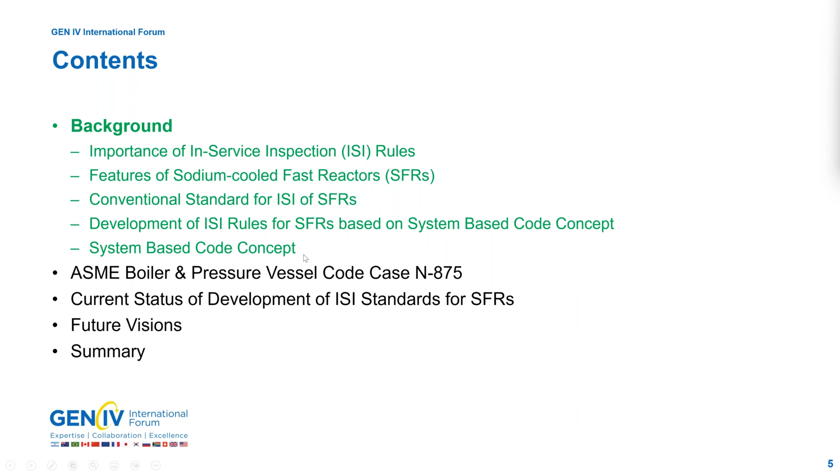In-service inspection rules provide requirements for periodic inspections of passive components of nuclear power plants, such as vessels, piping, valves, and so on, during the service, which is important for safety and stable operation. Effective and efficient ISI is crucial to suppress operation costs, which is one of the major components of power generation cost.

ISI is important not only after the start of plant operation, but also even during the design stage. Actually, ISI rules affect design of nuclear power plants because the accessibility to the components where ISI is required needs to be considered appropriately in the design. Sometimes it might be more reasonable to change the design so that ISI can be exempt. Like this, ISI is important from various points of view. So ISI rules need to be developed rationally by considering relevant features of reactor type and design of an individual nuclear power plant.

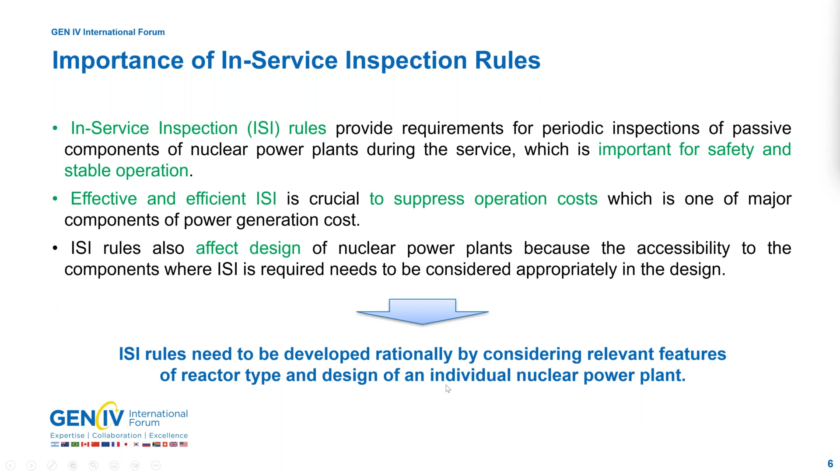As you may already know, sodium-cooled fast reactors have several different features from the conventional light water reactors. This table shows a comparison of operating conditions and the dimensions of reactor vessel as an example of the main components between PWR type LWR and SFR. More precisely, Monju prototype fast reactor in Japan.

Of course, sodium is used as coolant material in SFR. Sodium is opaque and chemically active, which makes it difficult to apply the traditional or conventional ISI technique to SFRs. Needless to say, visual tests using camera cannot be used under sodium, and conventional ultrasonic and surface examination are not as easily performed as in LWRs because of the limitation of the accessibility.

On the other hand, sodium shows excellent compatibility with structural materials. In SFR, the corrosion is negligible in purity controlled sodium, while corrosion such as stress corrosion cracking is one of the main concerns in LWR.

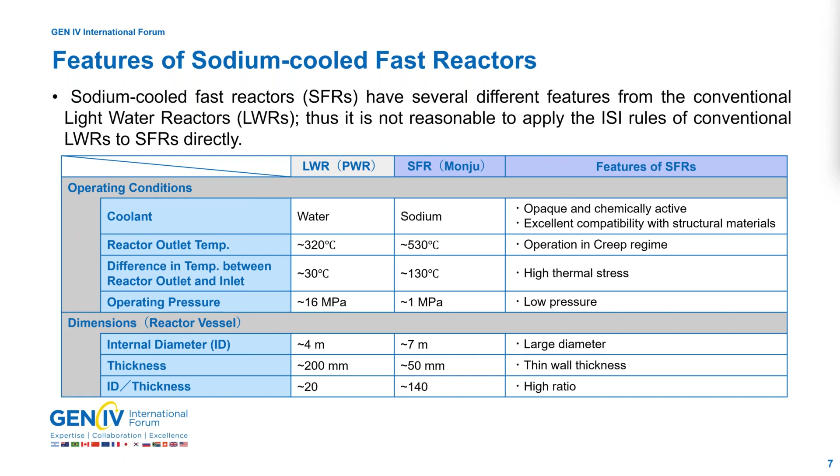Historically, the American Society of Mechanical Engineers ASME Boiler and Pressure Vessel Code, Section 11, Division 3, had provided ISI rules for liquid metal cooled plants, as shown here.

Section 11, Division 3 was developed as part of the Clinch River Breeder Reactor Plant project in the US. Clinch River Breeder Reactor was a sodium-cooled fast reactor, so it is considered that this Division 3 is for sodium-cooled fast reactors. However, the code revision was suspended due to the cancellation of the project.

The several parts, including acceptance standards for examinations of Class 1 components, were left as being in a course of preparation. So it was practically difficult to apply to SFR plants.

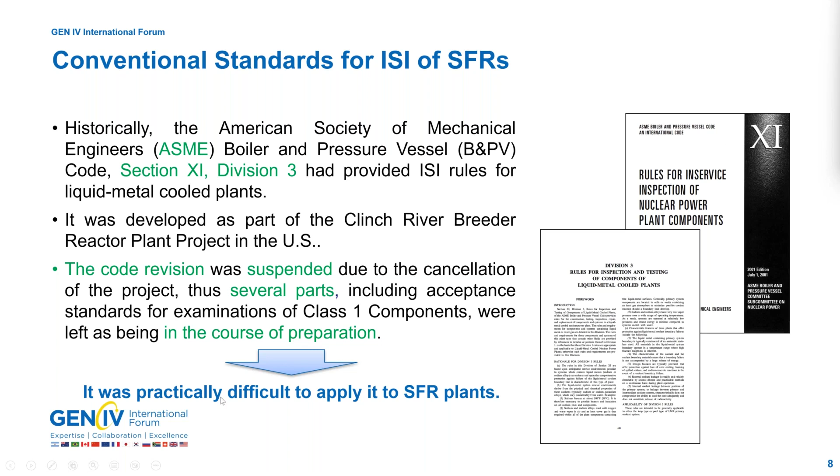To address this situation, the ASME-JSME Joint Task Group for System-Based Code was established about 10 years ago in the ASME Boiler and Pressure Vessel Code Committee.

As a result of collaboration between experts from ASME and JSME, code case N-875, which provides alternative ISI requirements for liquid metal cooled plants to Section 11 Division 3, was developed based on the system-based code concept and was issued in 2017. A fitness-for-service code for sodium-cooled fast reactors was concurrently being developed in JSME, and the first edition was approved last year.

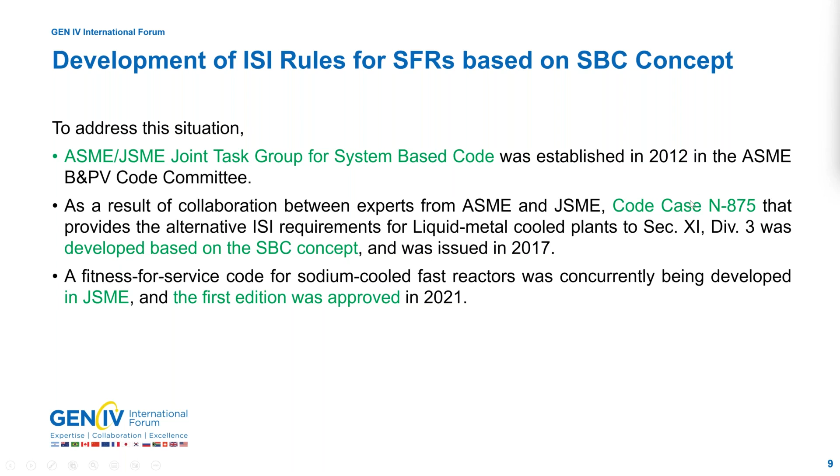So before explaining the details of code case N-875, I'd like to explain the essence of the system-based code concept.

By the way, the system-based code concept doesn't mean a kind of simulation code, but a kind of codes and standards, the set of provisions.

The system-based code concept was originally proposed by Professor Asada about 20 years ago. There are various technical areas related to the structural integrity of components, such as load, material, design, inspection, and so on.

And margin is given in individual technical areas kind of independently, and then accumulated like this. But how much is not clear, maybe too excessive.

On the other hand, in the system-based code concept, target reliability for the total structural integrity of the component is determined first, and then the component is designed to meet the required reliability.

The margins are distributed to each technical area. How to distribute the margin is flexible as long as the total integrity meets the reliability. So margin exchange between different technical areas is also possible.

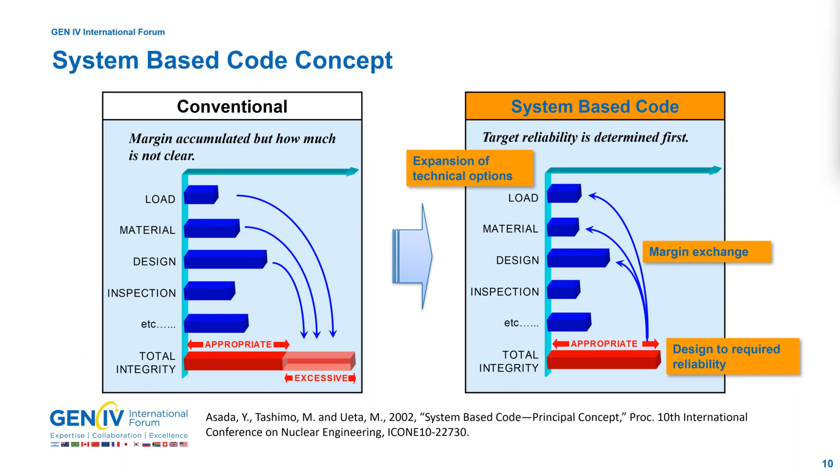From now on, I'd like to explain the ASME Boiler and Pressure Vessel Code Case N-875.

At first, an overview of code case N-875 will be presented, and what ISI is required alternatively to Section 11 Division 3 will be explained.

And then the logic flow to evaluate the applicability and the key technical elements for the evaluation according to the logic flow will be explained. And in the last part, an example will be presented.

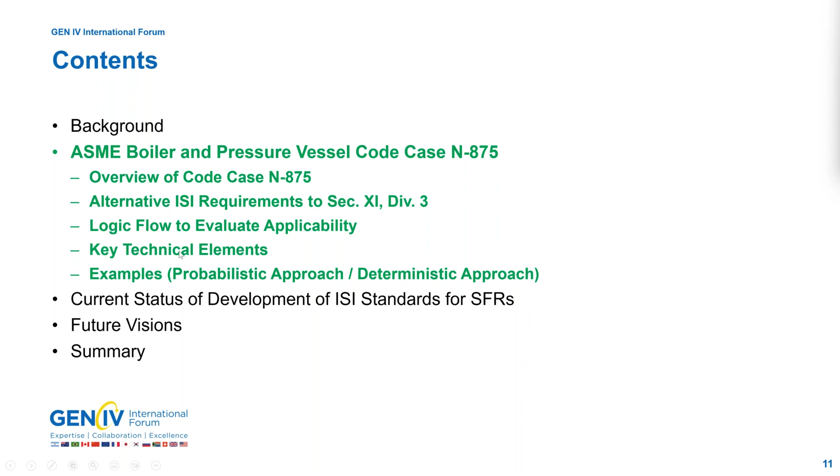So as already mentioned, this code case was approved about 5 years ago. This code case provides alternative ISI requirements to Section 11 Division 3 using the system-based code concept.

The code case is composed of the main body, which provides alternative provisions of the logic flow to establish criterion for the application, and 2 mandatory appendices.

Appendix 1 is a derivation of component target reliability from plant safety requirements. Appendix 2 is a procedure for structural reliability evaluation for passive components of liquid metal reactors.

Several key parts of the code case have been incorporated into the new Section 11, Division 2 requirements for the RIM program for nuclear power plants, as explained later.

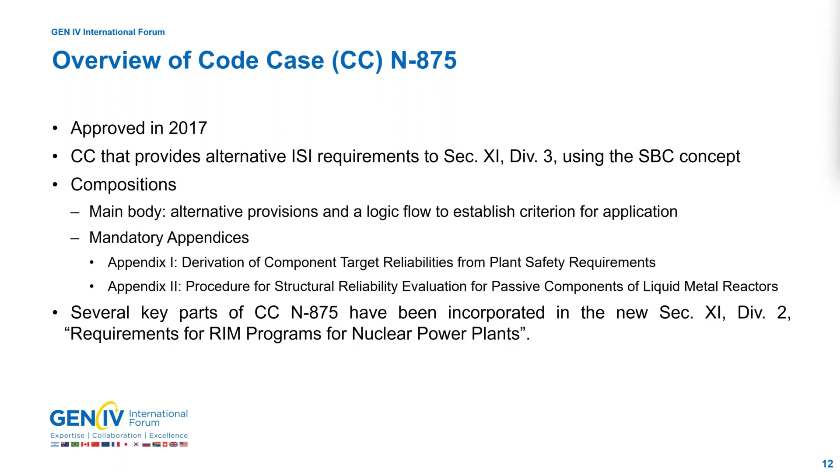As for liquid metal retaining welds in Class 1 vessel or piping, continuous monitoring and VTM2, a kind of visual test, are required by Section 11, Division 3, while only continuous monitoring is required by Code Case N-875 if the conditions identified using the SBC concept are satisfied. The acceptance standards for continuous monitoring were in the course of preparation in Section 11, Division 3, but in Code Case N-875, the acceptance standards for continuous monitoring were newly prepared.

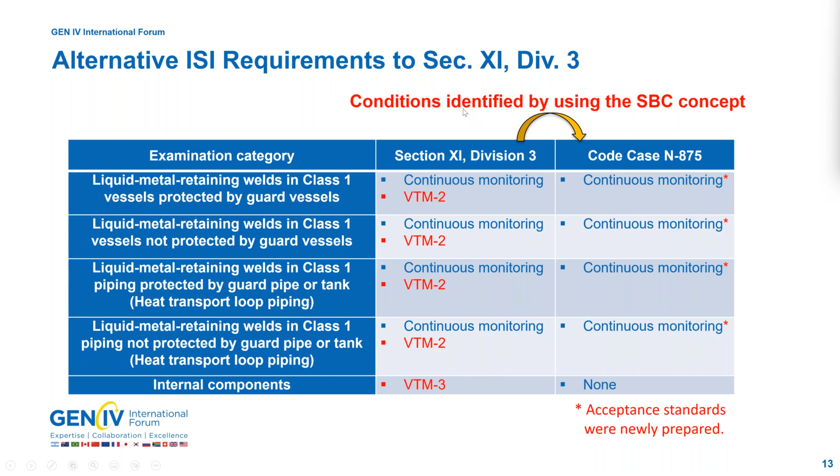Acceptance standards for continuous monitoring in the code case were prepared using the related provisions in Division 3 and the experience in Japan.

Once leakage is indicated, it is required to conduct a confirmation of leakage in accordance with the procedure predetermined by the owner. If the confirmation takes longer than the determined time, it is conservatively evaluated that the leakage is confirmed. In that case, immediate shutdown of the system is required. If the leakage is unconfirmed, it is considered the indication was due to fault of the monitoring system, so a repair of the leak detectors is required to meet the minimum percentage of required working leak detectors.

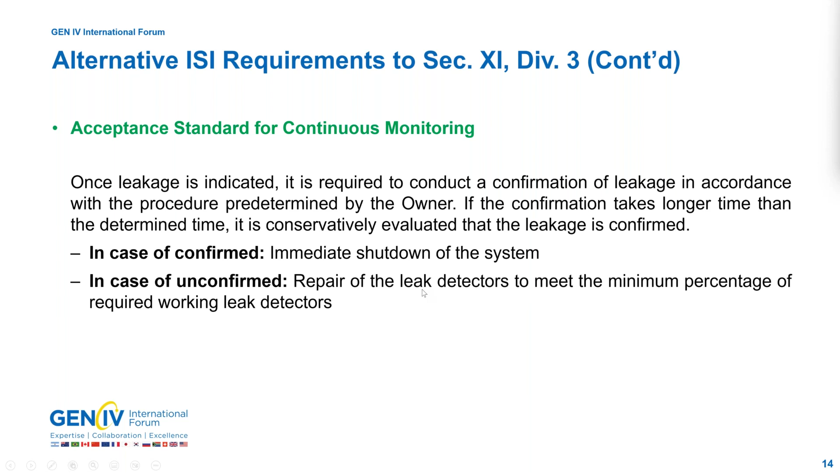This is a logic flow to establish criteria for application of the alternative ISI requirements, as explained previously, based on the SBC concept. The logic flow consists of 2 evaluations that compensate each other. Stage 1 evaluation is structural reliability evaluation, and stage 2 is safety-related evaluation. Both probabilistic and deterministic approaches are applicable.

This logic flow was originally developed for this code case, but it could be used more generally. Actually, it has been incorporated in the appendix for alternate requirements for NDE and monitoring in the new Section 11, Division 2.

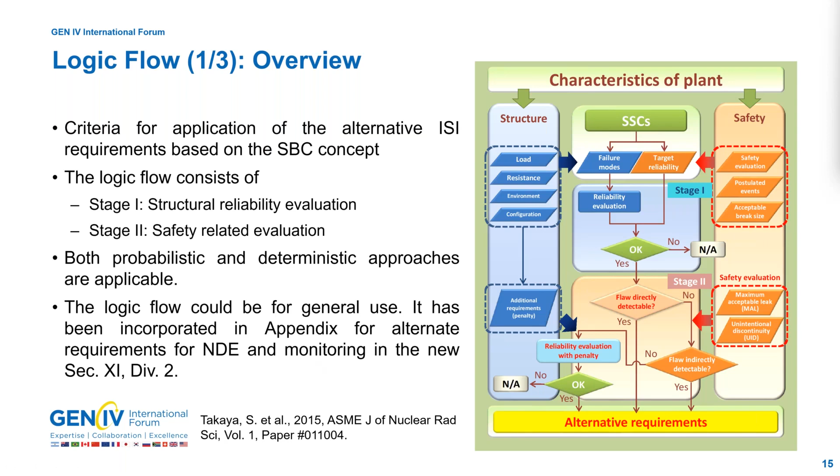I'd like to explain stage 1 and stage 2 evaluations in a little more detail. In stage 1 evaluation, the component level structural integrity under design basis conditions are considered. Potential failure modes are determined based on the degradation mechanism identified from inputs on load, resistance, environment, and configuration. Component level requirements, CLRs, are determined in a deterministic or probabilistic manner based on input related to safety evaluation.

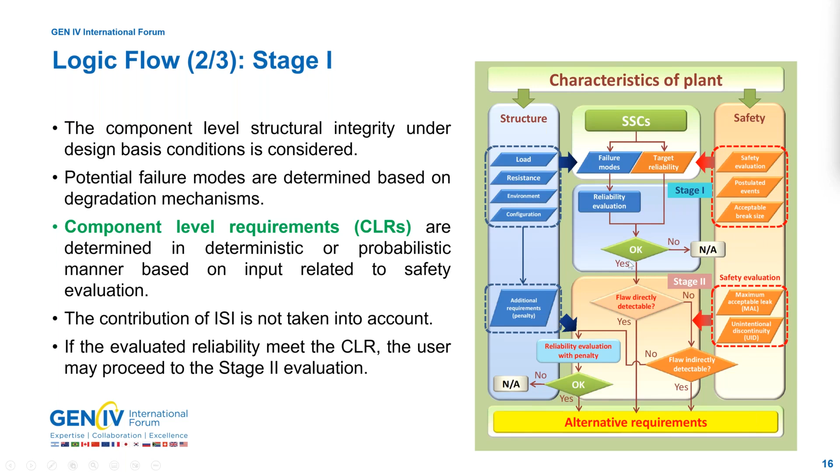Component level requirements established in a probabilistic manner are called target reliability in this code case. Then the reliability of the component is evaluated. At this moment, the contribution of ISI is not taken into account. The evaluated reliability and target are compared, and if the evaluated reliability meets the target CLR, the user may proceed to the stage 2 evaluation.

In the stage 2 evaluation, the ability to detect flaws that ensures the plant can be safely shut down before the flaw reaches the maximum acceptable size is considered. Either direct or indirect detection is allowable, which makes it possible to select suitable ISI technology flexibly according to the plant features.

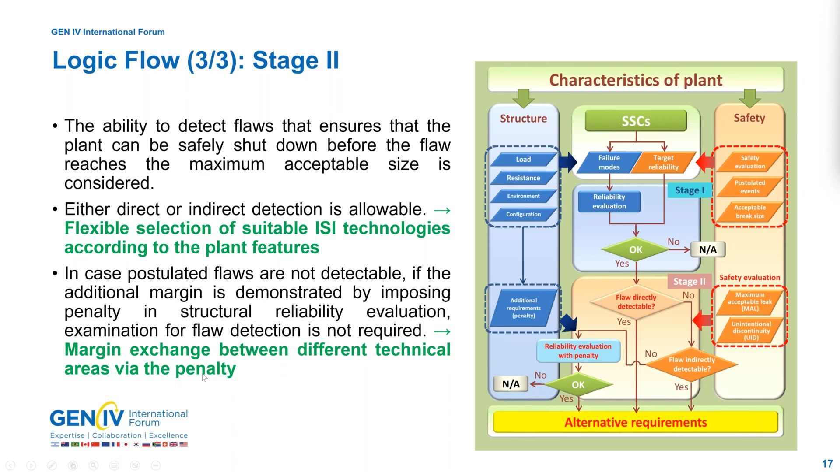In the case postulated flaws are not detectable, we proceed to the reliability evaluation with a penalty. This additional margin is demonstrated by imposing the penalty in the structural reliability evaluation. Examination for flaw detection is not required, which represents a margin exchange between different technical areas via the penalty.

From now on, I'd like to explain key technical elements needed for the evaluation according to the logic flow. The first is determination of failure modes. The degradation mechanisms that can potentially produce flaws during service are evaluated based on the list of potential degradation mechanisms provided in the code case, as shown here, as well as operating and research experience. Failure modes are determined based on the identified degradation mechanisms, and failure modes not addressed in the design code are also considered if necessary.

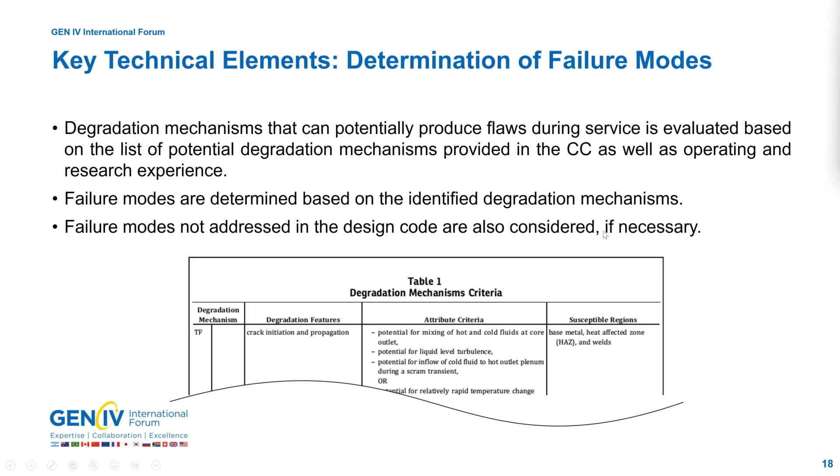Next is determination of CLRs, component level requirements. CLRs are established either deterministically or probabilistically based on the input related to safety evaluation. Deterministically established CLRs are quantities such as the break size postulated in an accident scenario that define the allowable limits from the safety point of view.

Probabilistically established CLRs are component level target reliabilities derived from quantitative plant level requirements available in quantities such as core damage frequency, containment failure frequencies, or large early release frequencies. A method for derivation of a component level target reliability is provided by Appendix 1 of the code case.

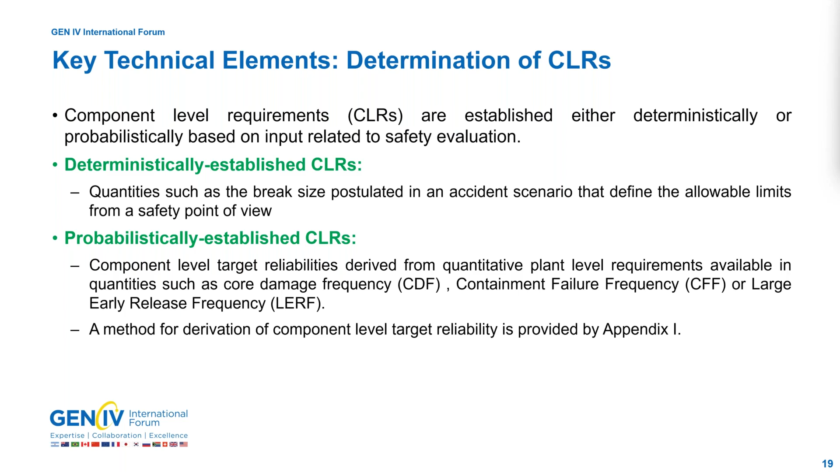In Appendix 1, to derive component level target reliability, a probabilistic risk assessment, PRA, is used. A PRA is usually used to integrate the individual reliabilities into the risk index. In that case, a structural reliability is one of the inputs for PRA analysis, and risk indices such as CDF, CFF is output. On the other hand, the developed method used PRA in a reverse way to derive component level structural reliability from plant level risk target.

In this case, target structural reliability is output, while risk target is one of the inputs. Target structural reliability is determined to meet the risk target by using PRA analysis models under provided conditions.

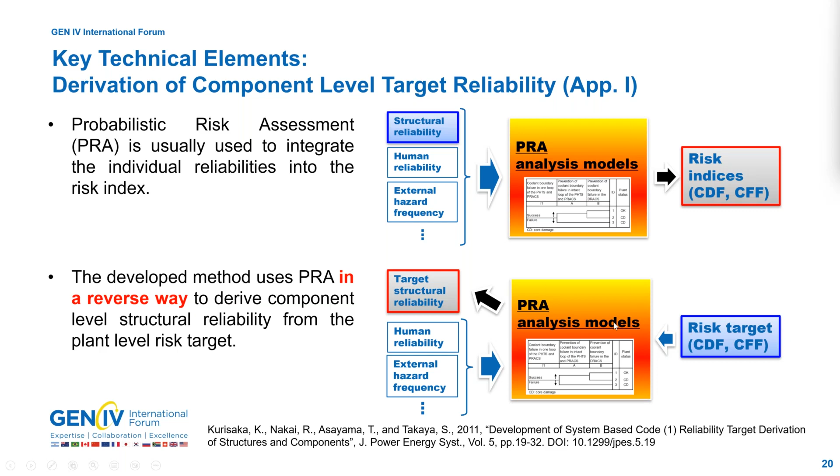To compare with target, reliability needs to be calculated, but calculated structural reliability could vary depending on which and how uncertainties are considered. To narrow such scatters of calculation, Appendix 2 uniquely provides the procedures for structural reliability evaluation for passive components. The procedures consist of the failure scenario setting, modeling, and failure probability calculation.

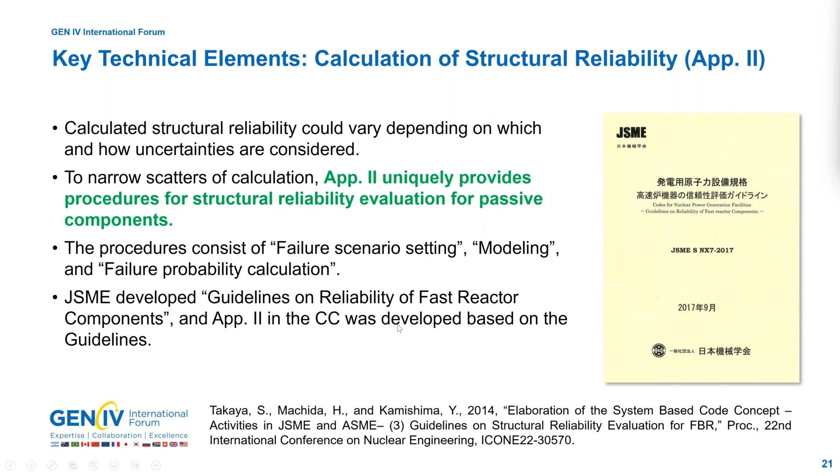JSME developed guidelines on reliability of fast reactor components, as shown here, and the appendix in the code case was developed based on the guidelines.

The next is evaluation of detectability of flaws. As explained, the basis of stage 2 evaluation is detectability of postulated flaws. Not only conventional direct detection, such as ultrasonic examination, but also indirect detection is allowable. Two new indices for indirect detection were introduced in the code case.

The one is maximum acceptable leak, MAL, which is applied for coolant boundary items. MAL is a leak that would not lead to an increase in the CDF or CFF/LERF that has been calculated in the safety evaluation of the plant.

The other is unintentional discontinuity, UID, which is applied for non-coolant boundary items. UID is a change in the plant parameters, such as temperature and velocity of coolant, that indicates that flaws exist before they lead to an increase in the CDF, CFF, or LERF that has been calculated in the safety evaluation of the plant.

By expanding technical options, a suitable ISI method could be selected according to the plant features.

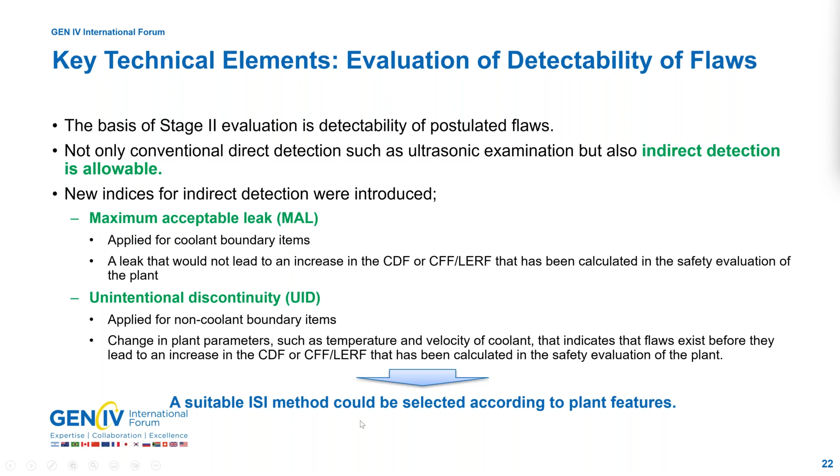The last one is reliability evaluation with penalty. If postulated flaws are not detectable, reliability evaluation with a penalty may be conducted. If the result meets the target reliability, the examination is exempt, to show that the component has enough margin even without ISI.

An unrealistically conservative yet logically imaginable penalty, which is correlated to the highest consequence failure mode, is determined from the following 4 categories. The first one is load: additional load caused by failure of an adjacent component or part of the component that reduces the loads on the critical portion of the component.

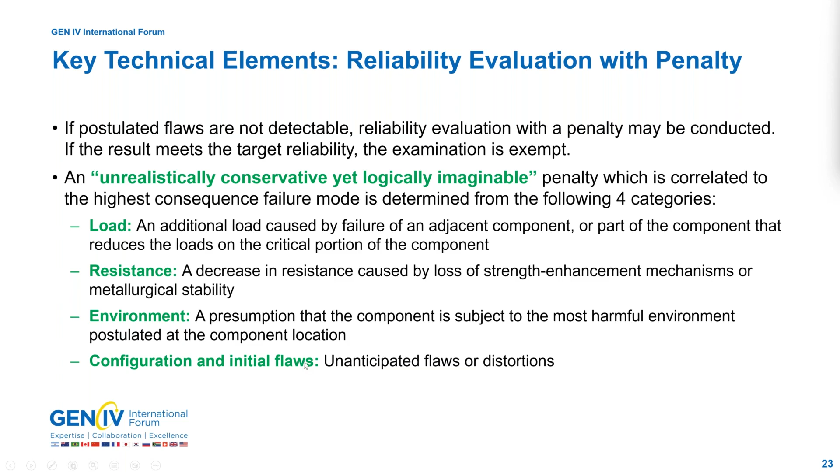Second one is resistance: a decrease in the resistance caused by loss of strength, enhancement mechanisms, or metallurgical stability. The third one is the environment: a presumption that the component is subject to the most harmful environment postulated at a component location. And the last one is configuration and initial flaws, such as unanticipated flaws or distortions.

So far, I explained the logic flow and related key technical elements. From now on, I'd like to show some examples according to the logic flow.

Evaluation according to the logic flow: several trial evaluations have been conducted for the components of the prototype SFR in Japan, Monju to illustrate the developed logic flow—upper core structure, core support structure, reactor guard vessel, and class 1 piping. Today, I'd like to show the results of a core support structure and class 1 piping as examples of the probabilistic approach case and deterministic approach case, respectively.

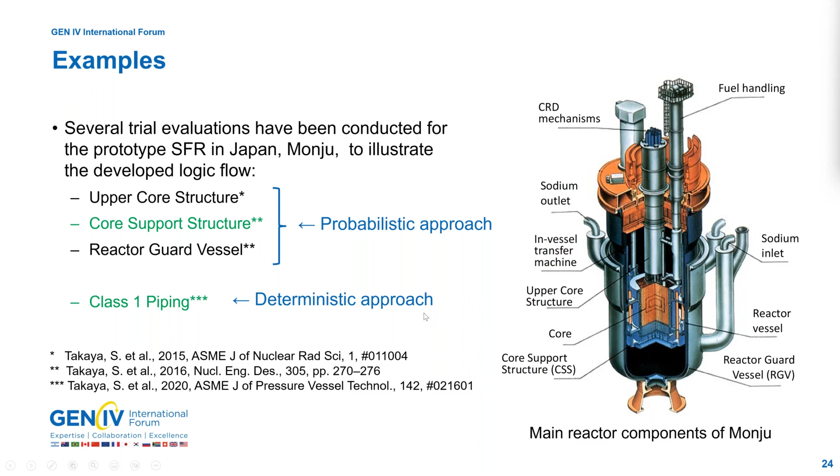The first one is the core support structure. Probabilistic approach was employed in this case. This table shows the basic information on the core support structure of Monju. The function is to maintain core configuration, and the CSS was made of type 304 stainless steel and used in sodium. Maximum temperature is about 400 degrees C. It's high, but under the creep regime. The main load is cyclic load by reactor startups and shutdowns.

CSS is categorized as internal components, and Section 11, Division 3 requires VTM3, which is visual examination, intending to determine the general mechanical and structural conditions of components and their supports, and to detect discontinuities and imperfections.

While code case N-875 requires no ISI if the condition is satisfied, it is mentioned in Section 11, Division 3 that visual inspection, for example periscope and light, or combination of under-sodium scanning and dimensional gauging is available. But of course, conventional visual technique using periscope and light cannot be applied if the vessel is filled with sodium.

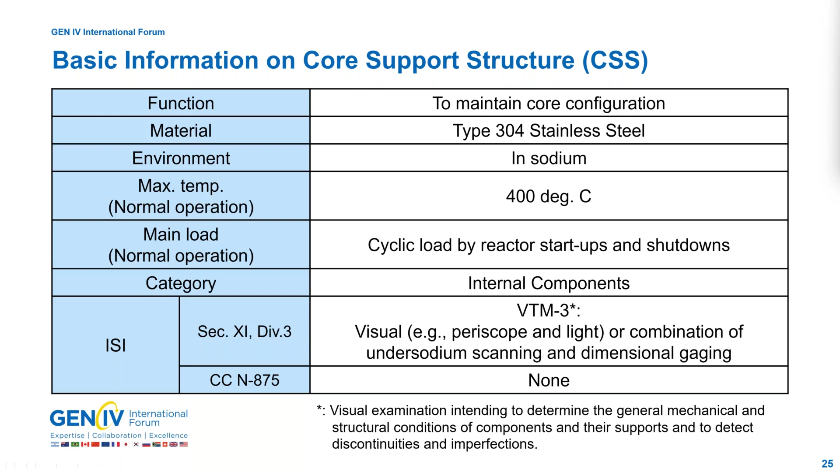So, firstly, failure mode has to be determined. Potential failure modes have to be analyzed exhaustively, even if they are not addressed explicitly in the design code.

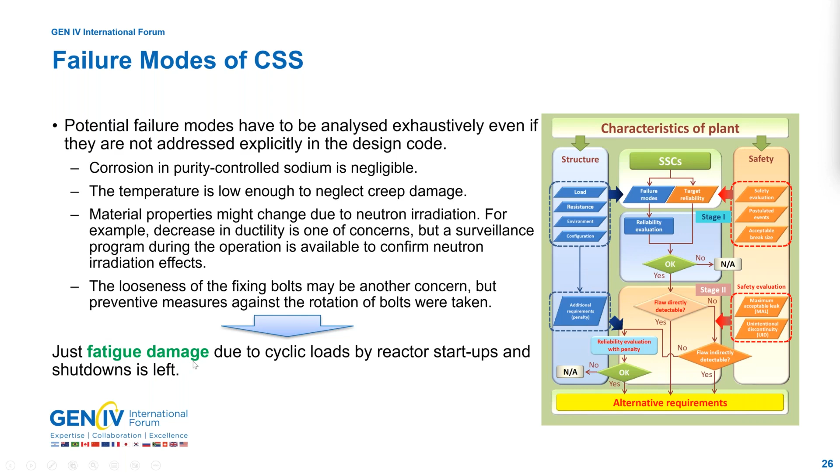First of all, corrosion in the purity-controlled sodium is negligible, and the temperature is low enough to neglect creep damage. On the other hand, material properties might change due to neutron irradiation. For example, decrease in ductility is one concern, but the surveillance program during operation is available to confirm the neutron irradiation effects. The looseness of fixing bolts may be another concern, but preventive measures against rotation of bolts were taken in the module. So, as a result, just fatigue damage due to cyclic loads by reactor startup and shutdown is left.

Next is establishment of the CLR. Probabilistic approach was employed for CSS. Plant level requirements are needed, but those values are not available for the module. However, such a discussion was made for demonstration SFR in Japan, JSFR, so those numbers are used in this example. That is, CDF is less than 10 to minus 6, CFF is less than 10 to minus 7.

And then plant level requirements are distributed by considering the plant PRA scope, whether the initiating event is internal or external, whether the initial plant operating state is during plant operation or shutdown state, and so on. These distribution factors are determined by the owner consistently with a plant safety design concept.

As for our example, the initiating events are internal events. Initial plant operation stage is power operation, and failure of CSS directly results in core damage. So the failure of CSS due to fatigue damage is categorized here. By using these numbers and also considering the design life of the module is 30 years, as a result, less than 6 times 10 to minus 9 was obtained as a target for failure of CSS due to fatigue.

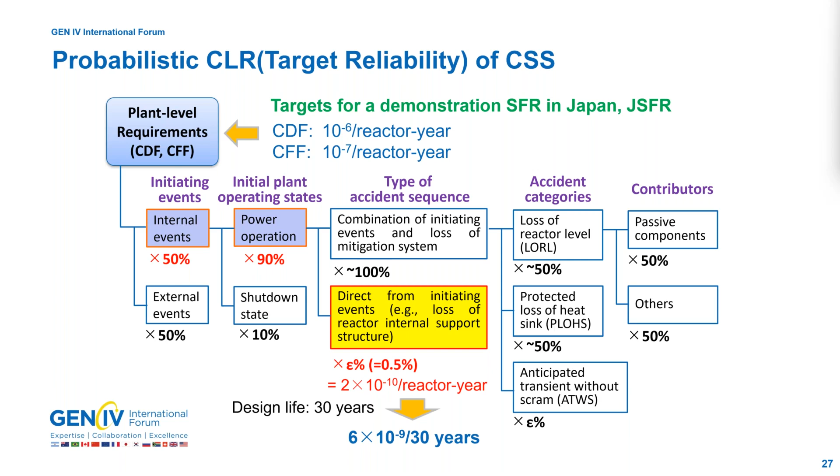So in this stage 1 evaluation, crack initiation evaluation was conducted. Crack initiation was assumed when fatigue damage df equals 1. N is number of cycles and NF is fatigue life. Evaluation position is at the mount arm from the RV, as shown here.

Precisely speaking, this part is not part of the CSS, but except for this position, there are multiple load transfer paths to maintain the core structure. So this part was selected as the evaluation position in this example.

Direct Monte Carlo method was employed for the calculation method. Number of samples is 10 to 9. And thermal stress and fatigue life was chosen as random variables.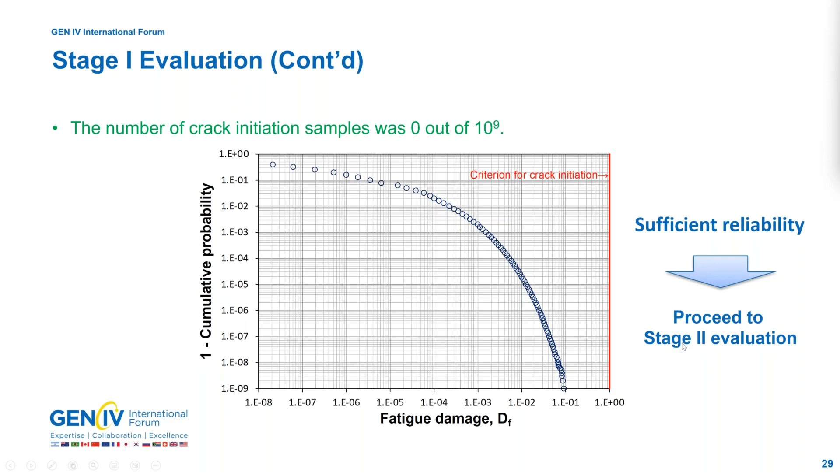So we proceed to a stage 2 evaluation. In the stage 2 evaluation, detectability of flaws is evaluated at first.

However, the appendix for the under-sodium scanning in Section 11 Division 3 was in the course of preparation, so it was assumed that the under-sodium scanning system was not available yet in this evaluation. It was also assumed that there were no monitoring methods to detect flaws in CSS. So we proceed to reliability evaluation with a penalty.

In reliability evaluation with penalty, as penalty, a fully circumferential crack with depth of 10% of the thickness that is too large to be missed was assumed as an initial defect.

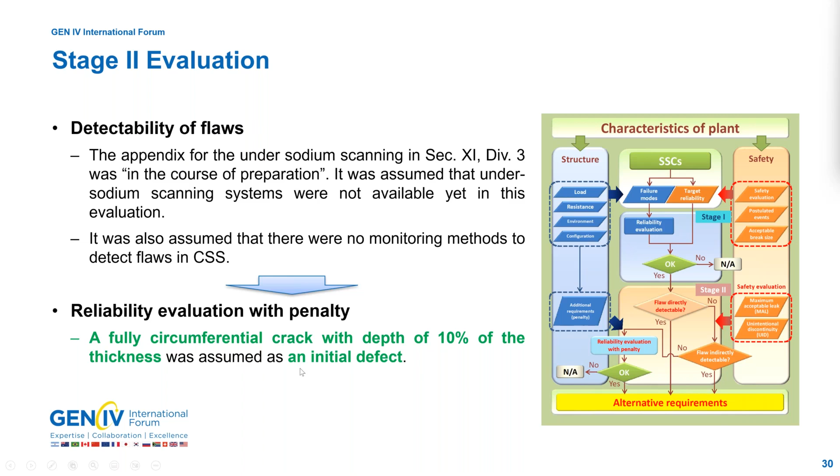And crack growth evaluation was conducted, and 50% of wall thickness was selected simply as the failure criterion. Direct Monte Carlo simulation was conducted. Number of samples is 10 to 9, and thermal stress and the coefficient in this equation was selected as random variables. The results are shown here.

Horizontal axis is crack depth, and vertical axis is 1 minus cumulative probability. Initial depth is here, and failure criterion here. As you can see, the crack hardly propagated, and the number of failure samples was 0 out of 10 to 9.

So it is shown that the component has sufficient reliability even with penalty. Based on this evaluation, it was concluded that alternative requirements of code case N-875 is applicable to the CSS module. That means no NDT is required.

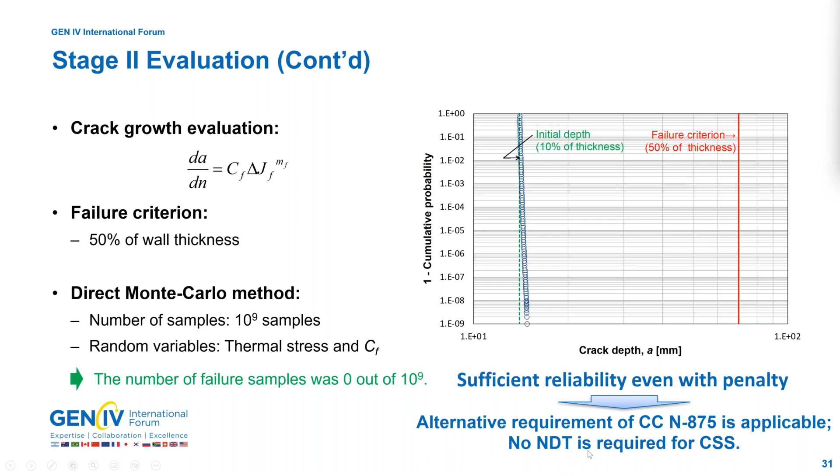So next is a second example: primary heat transfer system piping. The function is primary heat transfer, and this piping was also made of Type 304 stainless steel. Inside the piping is sodium, and outside is inert gas. Maximum temperature is above 500 degrees C.

It's in creep regime, and the main load is cyclic load by reactor startups and shutdowns. This piping is categorized as a liquid metal retaining class 1 piping, protected or not protected by guard pipe or tank, depending on the position.

Section 11, Division 3 requires continuous monitoring and VTM2, which is a visual examination intending to detect accumulations of liquids, liquid streams, liquid drops, and smoke. On the other hand, code case N-875 requires only continuous monitoring if the SBC condition is satisfied.

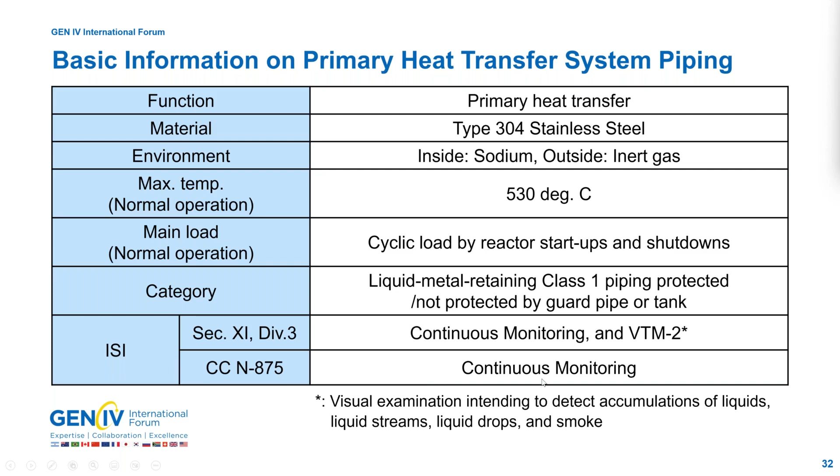So based on similar discussion as the previous example, crack initiation and propagation due to fatigue creep interaction damage was selected as a failure mode for PHTS piping. And next,

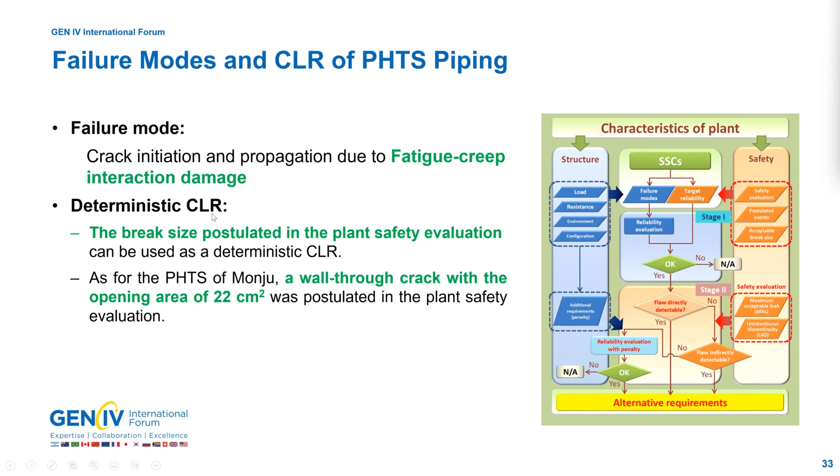the deterministic CLR was established. The break size postulated in the plant safety evaluation can be used as a deterministic CLR. As for the PHTS of Monju, a wall-through crack with opening area of 22 square centimeters was postulated in the plant safety evaluation. So this wall-through crack with opening area of 22 square centimeters was selected as a deterministic CLR for PHTS piping.

In the previous example, the probability of crack initiation was evaluated, but as a matter of fact, fatigue as well as fatigue creep interaction damage is already addressed by the design code. And therefore, fatigue creep interaction damage of PHTS piping is restricted below the design allowable level. So it is considered that the crack would not initiate and propagate to the size determined as a CLR in the condition of the PHTS. So such a deterministic approach was applied.

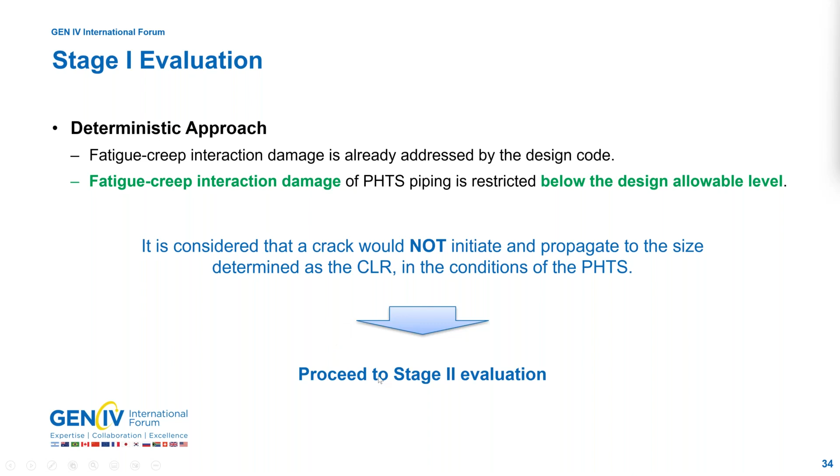We can proceed to stage 2 evaluation. In the stage 2 evaluation, detectability of flaws is evaluated.

In Monju, 2 sodium leak detection systems are installed for small scale leaks. One is sodium ionization detector (SID), which detects a leak by monitoring a change of ion current produced by ionizing sodium aerosol in an inert gas atmosphere. The other is differential pressure detector (DPD) that detects a leak by monitoring a change of difference pressure at a filter installed in the detector. These detectors are designed to detect leaks of 100 grams per hour.

Next, MAL, maximum acceptable leak, should be determined. In the plant safety evaluation of Monju, a wall crack with an opening area of 22 square centimeters, selected as a CLR, was postulated, and the leakage rate just after the accident was evaluated to be approximately 80 kilograms per second. So as you can see, the capability of leak detection of SID and DPD is much greater than the determined MAL.

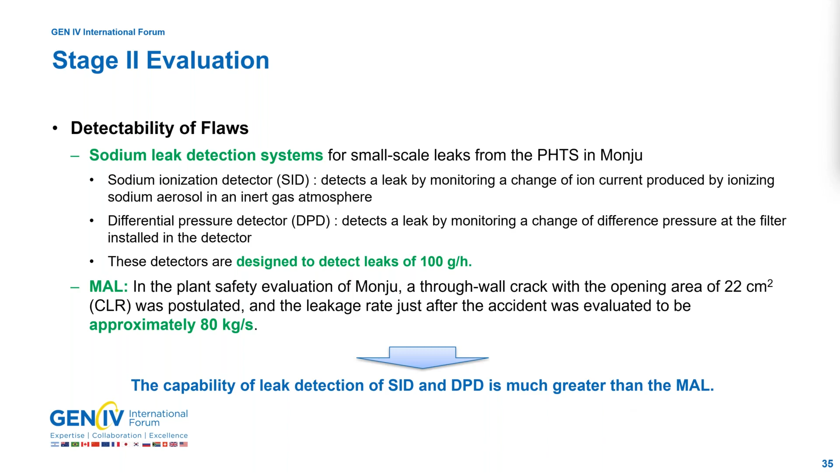And in addition to the capability of leak detectors, demonstration of leak before break is essential to show the effectiveness of continuous monitoring. Leak before break is a concept that leakage is detectable before break, so plant can be shut down safely.

So in this example, guidelines for LBB assessment of SFR provided by JSME were used. These are procedures provided in guidelines: unstable fracture assessment, leak rate assessment, and penetrate crack assessment were conducted. And if critical crack length CR is larger than both detectable crack length CD and penetrate crack length CP, it is considered LBB is demonstrated.

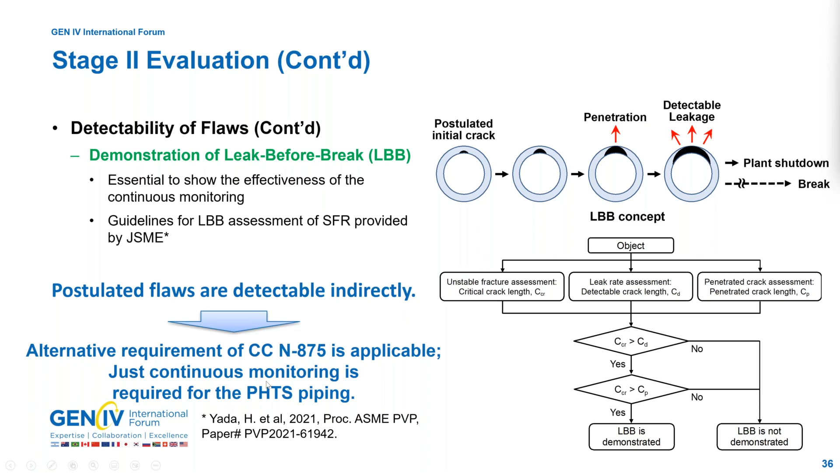As for this example also, LBB is successfully demonstrated. So postulated flaws are detectable. It was shown that postulated flaws are detectable indirectly. And based on this discussion evaluation, it was concluded that alternate requirements of code case N-875 are applicable. That means just continuous monitoring is required for the PHTS piping.

So here I'd like to explain current status of development of ISI standards for SFRs in JSME and ASME very briefly.

In JSME, standards related to ISI of SFRs are developed based on the SBC concept. As already mentioned, fitness for service code for sodium cooled fast reactors was approved last year. General rules and ISI requirements of class 1 components and their supports are provided in the first edition. And of course, continuous monitoring is required for coolant boundaries as code case N-875.

At the same time, guidelines for LBB assessment of sodium cooled fast reactors are developed and approved. The guidelines are available to determine the required sensitivity of leakage detectors for continuous monitoring. The guidelines for reliability evaluation of sodium cooled fast reactor components are also developed. This is a unique guideline providing procedures of reliability evaluation, which is important for the system-based code concept.

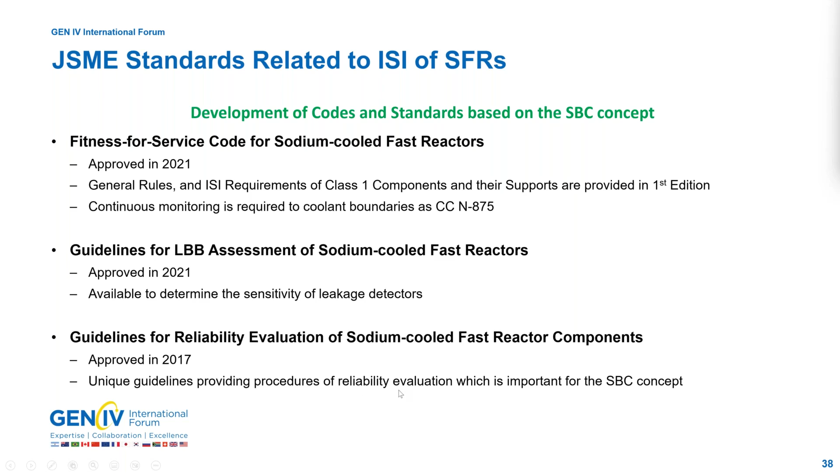In ASME, a brand new fitness for service code for all types of nuclear power plants, Section 11, Division 2, Reliability and Integrity Management, was published in 2019. Section 11, Division 2 provides technology neutral requirements and supplements for specific types of nuclear reactors, currently for light water reactor and high temperature gas reactor.

This is a flowchart of the RIM, but as you can see, the RIM shares the basic concept with the system-based code concept, and some part of the code cases has already been incorporated in the Division 2. The procedures for deriving target reliability in the code case are incorporated as mandatory appendix 2 in the Division 2, and logic flow and reliability evaluation procedures are included in non-mandatory appendix A.

As I said, currently supplements for the sodium cooled fast reactor were not included in the Division 2, but development of a supplement for liquid metal sodium cooled fast reactors is one of the top priority action items of Section 11 committees. Therefore, the ASME, JSME Joint Working Group on RIM Process and SBC is now developing the supplement based on the ASME Section 11 Division 3 code case N-875, and JSME standards, including LBB assessment guidelines for SFRs.

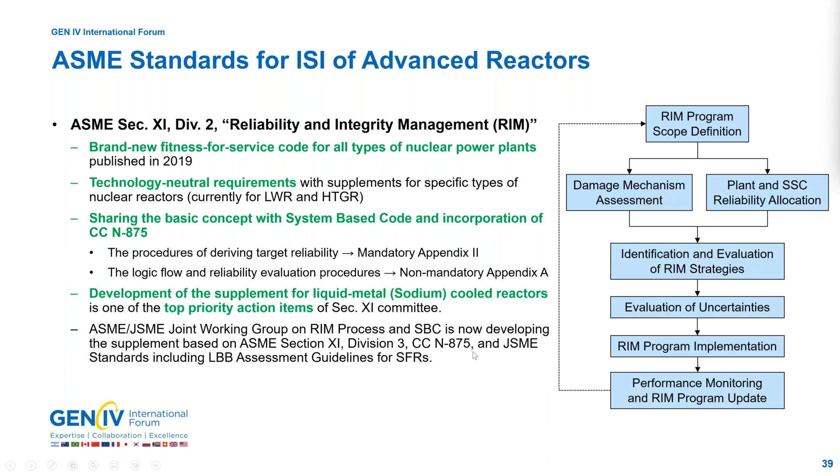So lastly, I'd like to talk about future vision. This figure is an image of the structure or hierarchy of the standards. Top of that is safety goals, and the safety standards are prepared to achieve the safety goals. And structural standards are prepared to support safety standards.

However, the relationship between structural standards and safety standards is sometimes unclear. Sometimes it is difficult to say what safety functions are implemented by following certain provisions in structural standards. So a closer link between safety standards and structural standards is essential to develop nuclear power plants that balance safety and economic efficiency at a higher level. A reliability target or target reliability is a promising key concept to link both standards. And also, technology inclusive development of standards is important.

It is essential to develop standards for various types of advanced reactors efficiently in a timely manner. The structure of RIM, combining a common part, a technology neutral part, and a specific part with specific rules for each reactor, is very reasonable. Such structure is important from the view of explainability. If the common part is shared among all types of reactors, the adequacies of that common part need not be explained repeatedly.

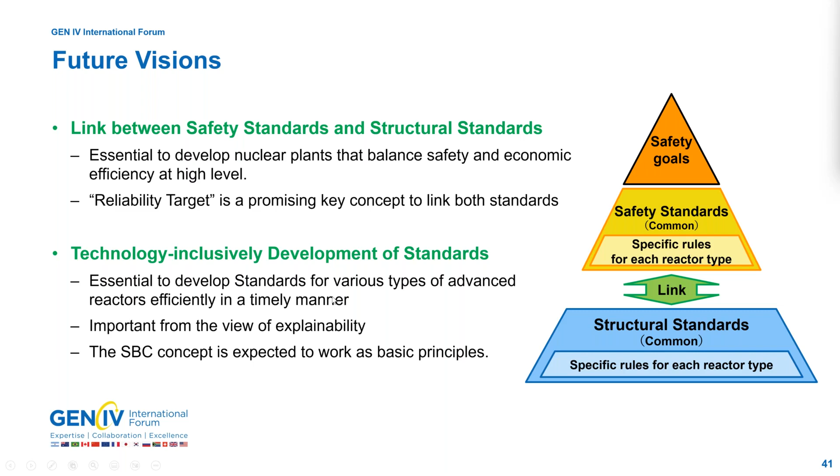And as explained in this presentation, the flexible and consistent concept of the SBC is expected to work as a basic principle to develop technology inclusive standards, as well as specific rules for each reactor.

In summary: effective and efficient ISI is crucial for safety, stable operation, and economic efficiency of nuclear power plants. SFRs have several desirable features such as excellent compatibility between sodium and structural materials, while traditional volumetric and surface tests are not as easily performed as in light water reactors. The system-based concept can be used to develop ISI rules rationally by considering relevant features of reactor type and design of individual nuclear power plants.

ASME boiler and pressure vessel code case N-875 is a good and important example of development of codes and standards based on the SBC concept, and the details are introduced in this presentation. Recently, the new Section 11 Division 2 RIM has been developed for various advanced nuclear reactors. RIM shares key concepts with SBC, and the code case has been partially incorporated in the RIM. JSME has also developed a new fitness for service code and related guidelines based on the SBC concept, and a link between safety standards and structural standards, as well as development of technology inclusive standards, are important for advanced reactors.

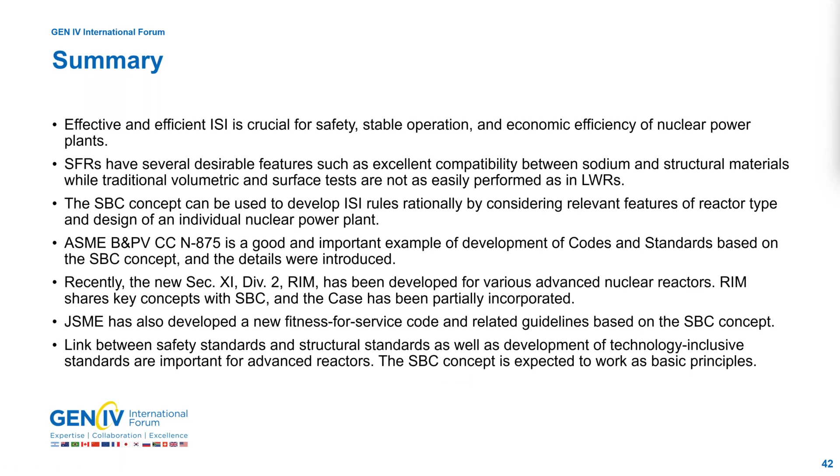The SBC concept is expected to work as a basic principle. This is the end of my presentation. Thank you for your attention, and I'm happy to answer questions.

Thank you. Thank you. Thank you, Dr. Takaya.